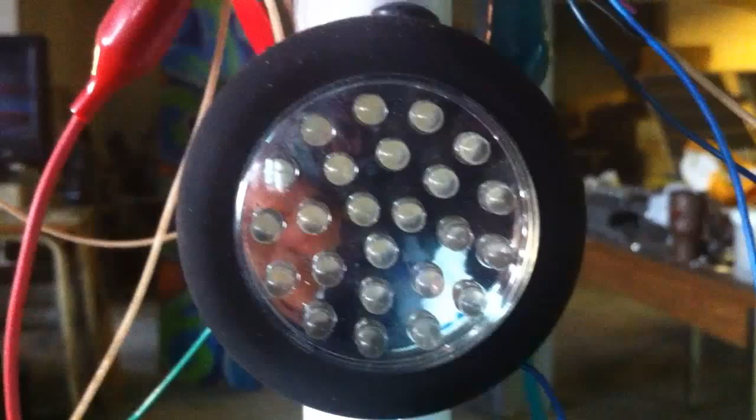Okay, back up because it's...

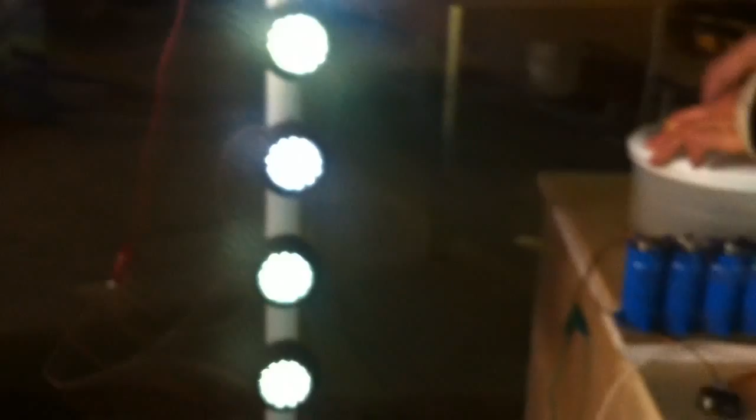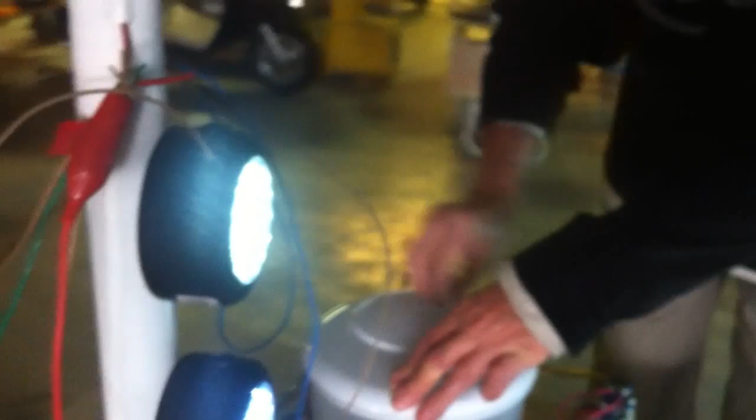Each one of these is 24 LEDs at about 15 milliamps, so each headlight is about 360 milliamps. So 3 of them are 1 1/8 amps, and 6 of them are 2 1/4 amps. Of course, that's at 3.5 volts. This is not at 40 volts.

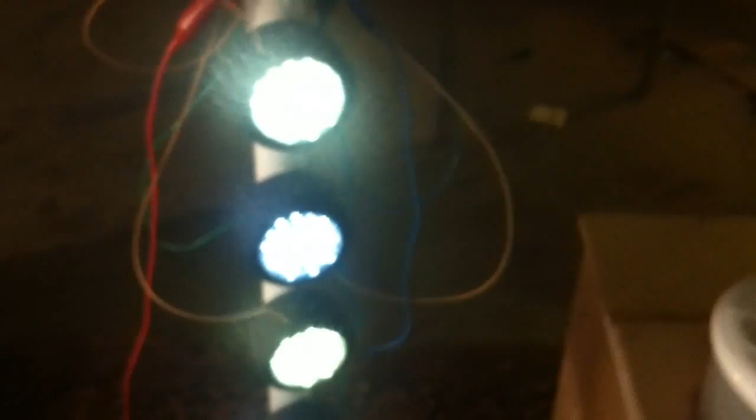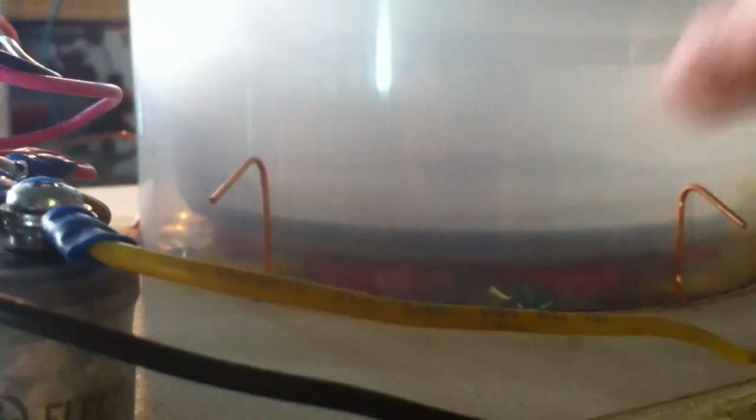But if you look here, this is a salad spinner type. I put the magnets in the bottom and the coils underneath. So the magnets spin, and it's got about a 10-to-1 ratio, maybe a 7-to-1 ratio. So it's going 10 times as fast as my hand's going around. So if my hand's going 200 a minute, it's going 2,000 a minute. And that's what is producing the light, and you see the control you have with an accelerator in the center of some kind.

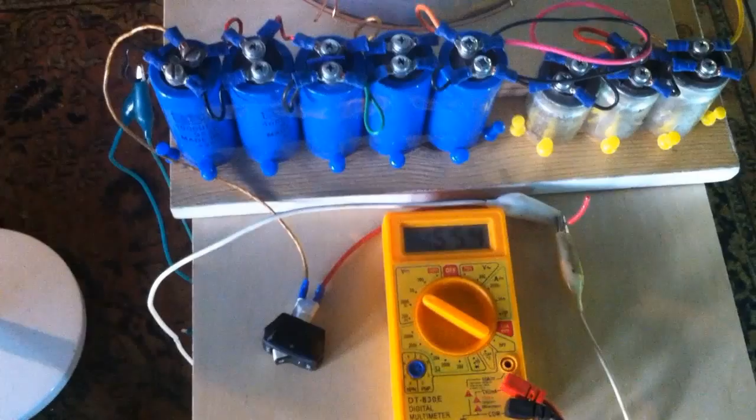All right, now you can look at the voltage, because the voltage is going to go up. The highest I've had it is 13. Whoa! I don't have the switch on. See that? How fast it goes up?

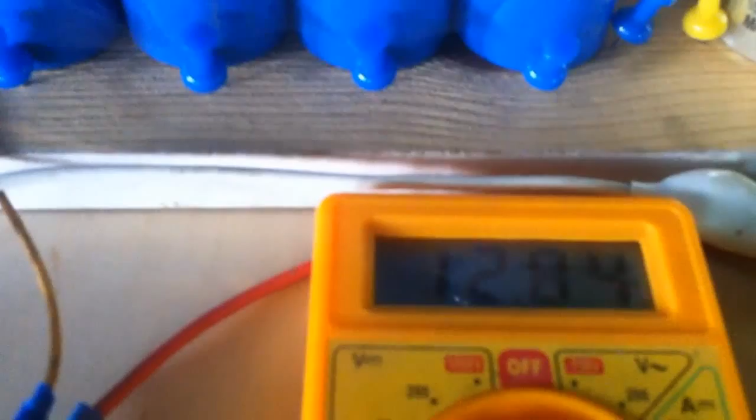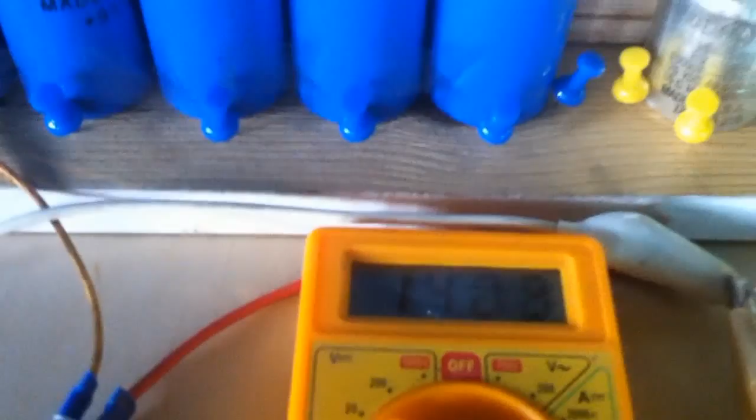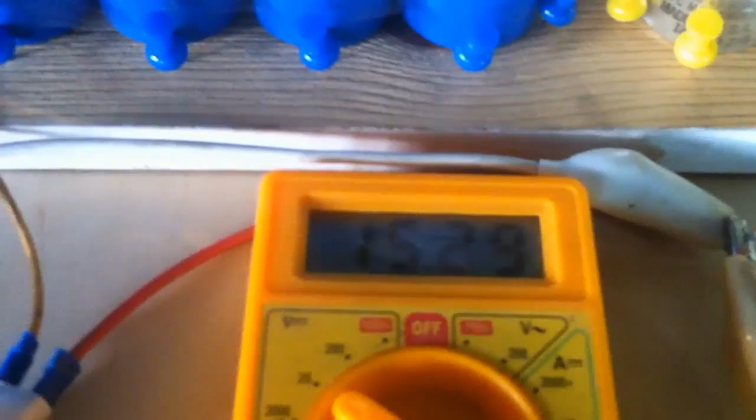Okay, it's got about 20,000 microfarads in those 7 capacitors. And I can get it up to 14, 14.5, almost 15. 15! That's the highest I got, almost to 16 volts. So that's the top output of this particular one.

And by the way, these are very small magnets and very small coils. I mean, it's 1-inch magnets, 1/4 of an inch thick, and 300 turns of number 26 wire for the 3-phase thing.

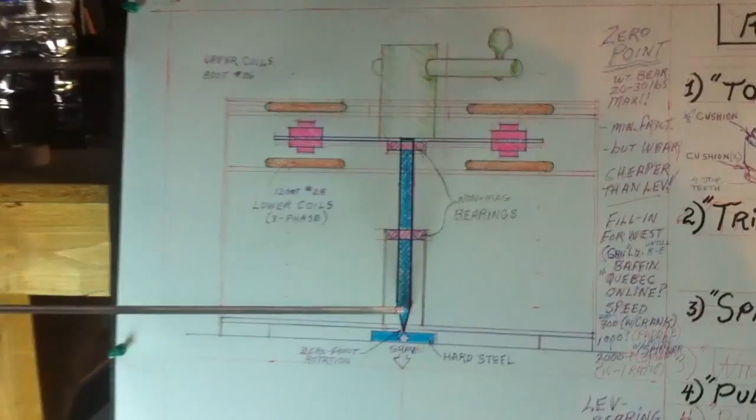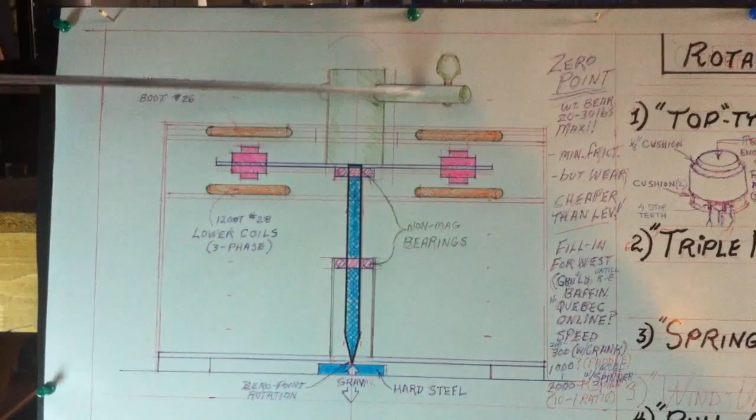That's okay. Okay, so this is the zero point apparatus. This is a 3/8 inch steel rod on a hard steel base that's in the big one. And it's got a couple of non-magnetic bearings to act as stabilizers, but virtually zero resistance, except rotational resistance of the inertia. And I have an old-fashioned crank shaft on it.

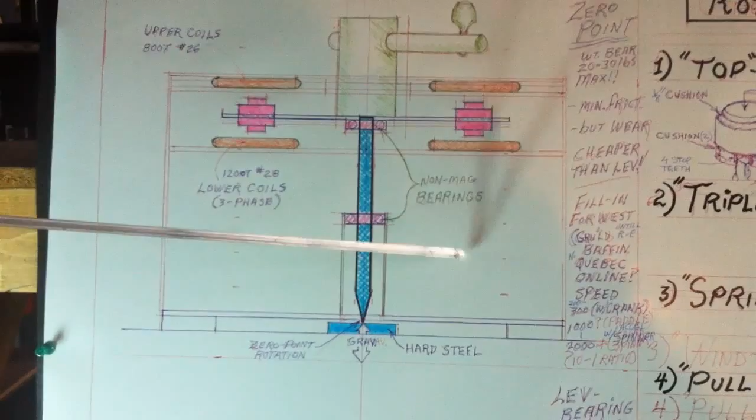So this cuts down resistance for 20 or 30 pounds of magnet weight, spinning between two sets of coils. When you get more weight, the wear is greater on the single point. So, you know, it's limited, and yet it's very efficient, and it may fill in for the Western powers before they get rare earth deposits that have been found in Greenland, the coast of Greenland, Baffin Island, and northern Quebec,

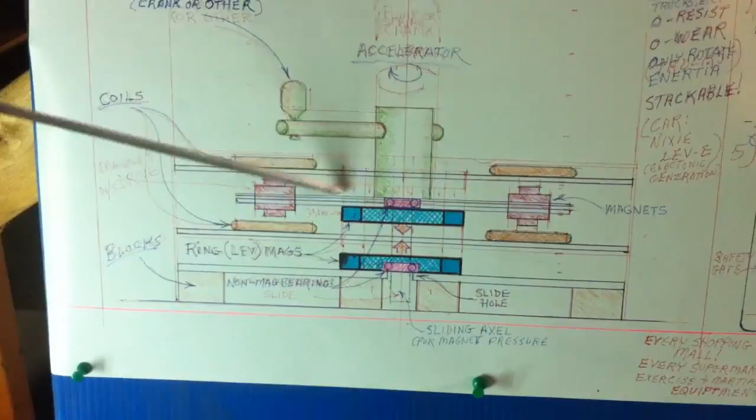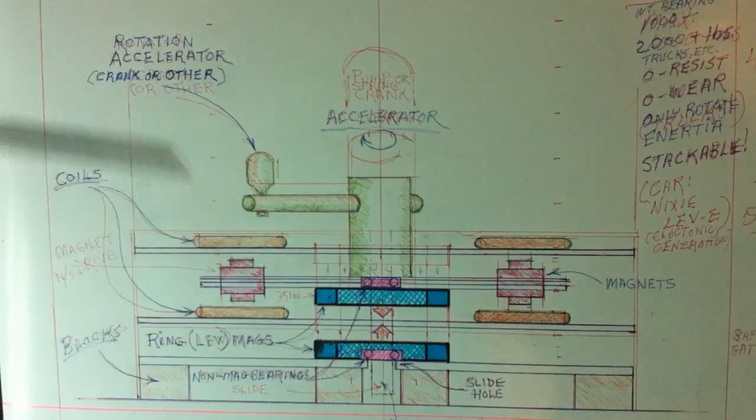and come online. Here is a version that I've only built half of, the lower half, of ring magnets. And in this case, with a decent power of the ring magnets, 4 inches is the biggest ones I've used, you can have 1,000 or 2,000 pounds pressing down. So you could stack up these all the way you want and turn them with a little finger at the top, and that's going to be good for trucks, heavy semis, heavy transport in the future.

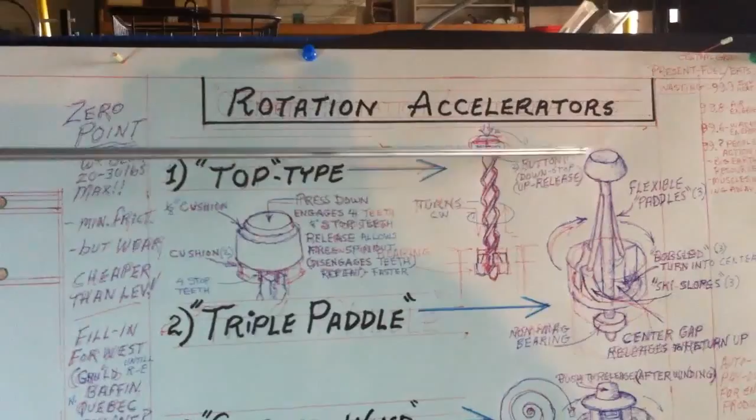Okay, so the problem here was, you're limited from the outside to maybe 100 revolutions per minute, like a children's tilt-a-whirl in the playground, pushing it from the outside, flipping it. And with a crank here, you get up to 200 or 300. But if you have an accelerator, as you've just seen, on the salad spinner type apparatus, then you can go up to 2,000, 1,500, 2,000. And with fingertip control with the right one.

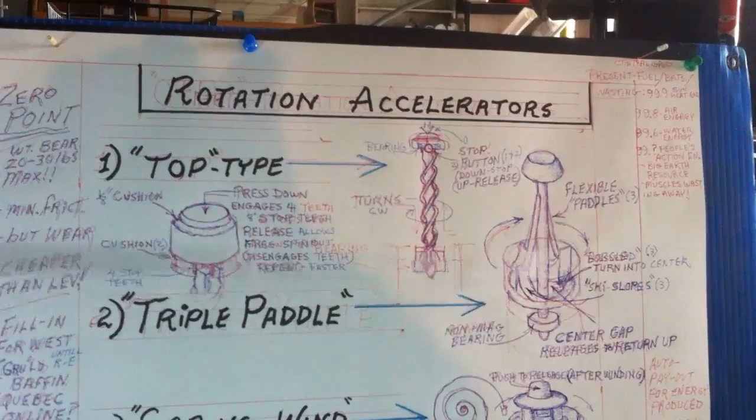Here's the classic top, which inspired the push-down types. Here's one I call the paddle one. And the paddles, as you dip them down, go toward the middle so it releases. This one needs a stop button or 4 little pins that engage and a cushion on top so that when you press down, it engages and stops the thing, so it drives the magnets, and when you release it and go up, maybe there's a spring or another cushion underneath, rubber cushion, elasticity, it releases and lets it just spin freely until you push down again.

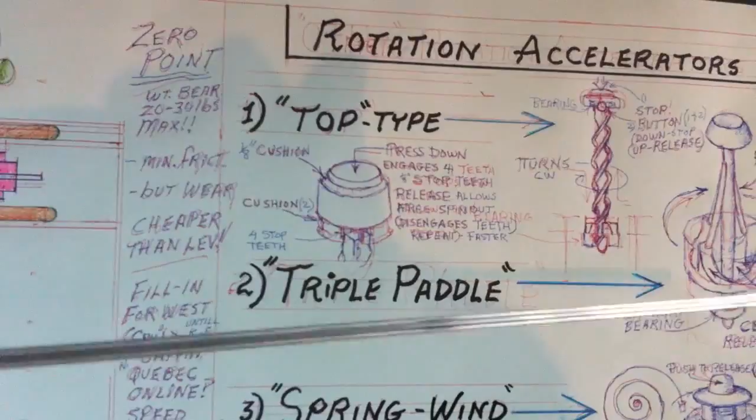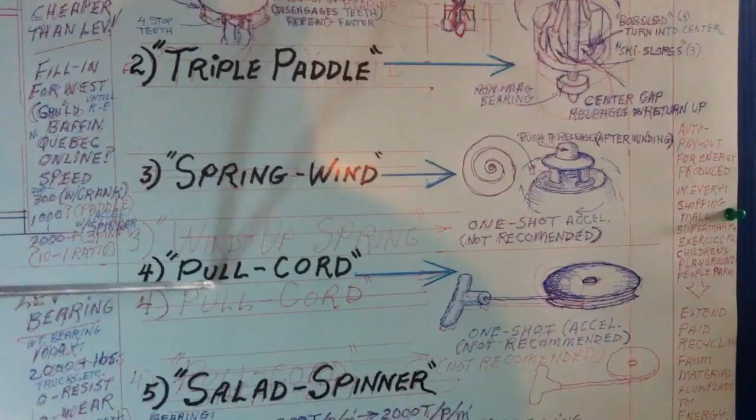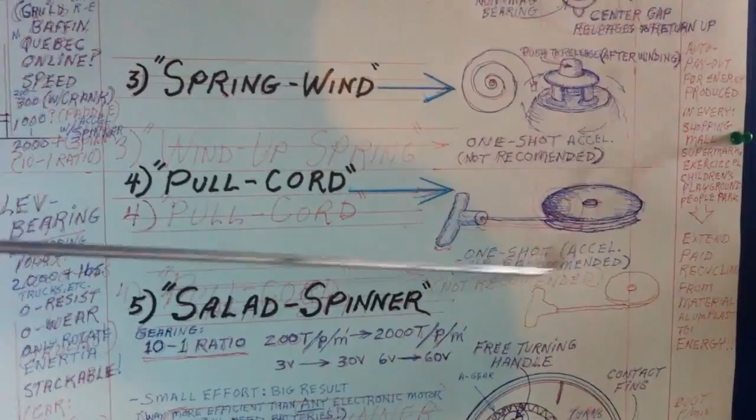Here are those, those are the first two. Here's a spring wound one, and you've seen them in the kids' toy stores, with electronic things and so on and so forth, very inexpensive, imported from China. And here's a pull cord one, and some of the salad spinner types have the pull cord, the older ones, right? It's modeled after chainsaws and outboard motors and things like that.

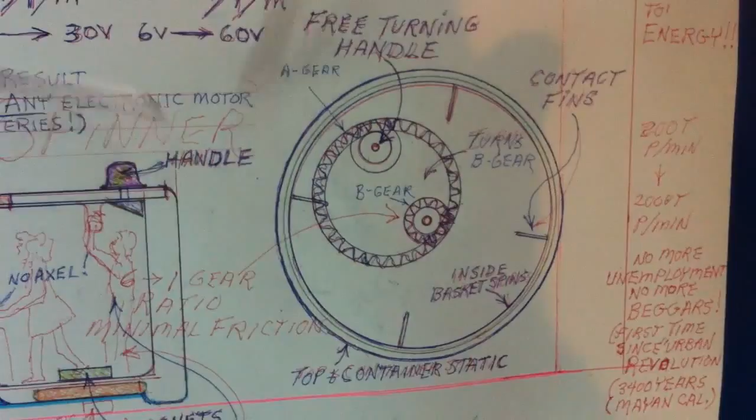And finally, there's the salad spinner types. There's several types. But the interesting thing about the salad spinner, besides the acceleration of the center thing here, and you can see the cogs, right, and the handle that you pull around on the type we just used, is the inverted zero point.

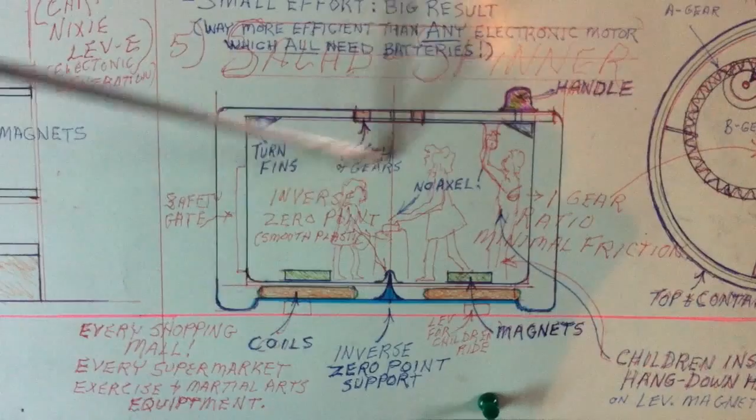The inverted zero point is a little plastic hill that comes to a point, enclosed by a little plastic thing at the bottom. They all have that, all types. It means that when you push down, you need no axle, unlike this primitive type here with the positive zero point action. Also the plastic is very smooth, so you have virtually no resistance.

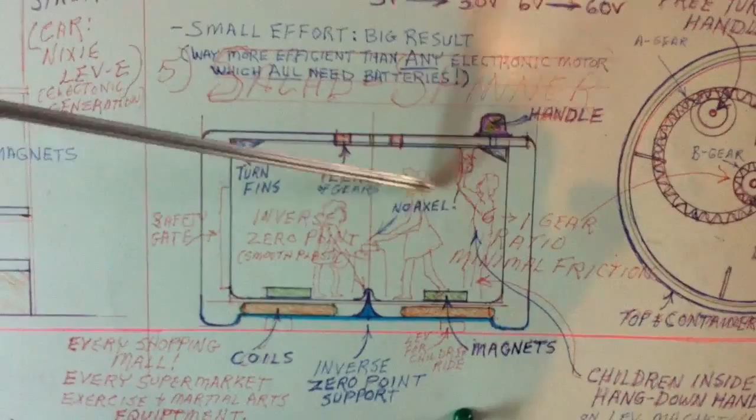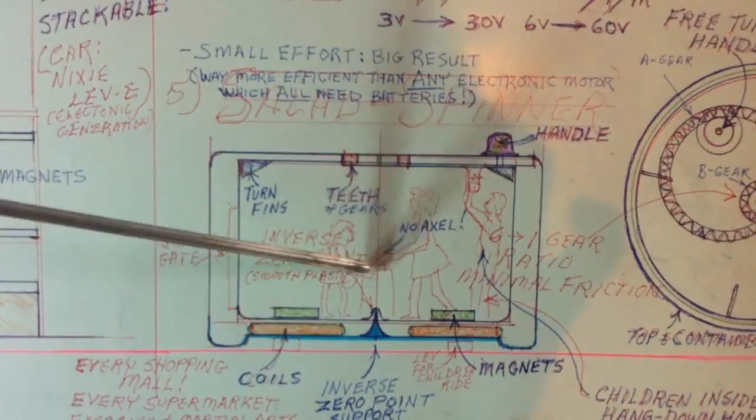You can see I sketched in some children on the inside of it, one of them has the knob hanging down from the ceiling, and the other is pushing the knob in the middle. So this is a safety door with a safety thing on the outside, so they can't fall out or anything. And this is perfect because kids around 3 or 4 love to be spun around. They're exercising their body and learning their sense of balance.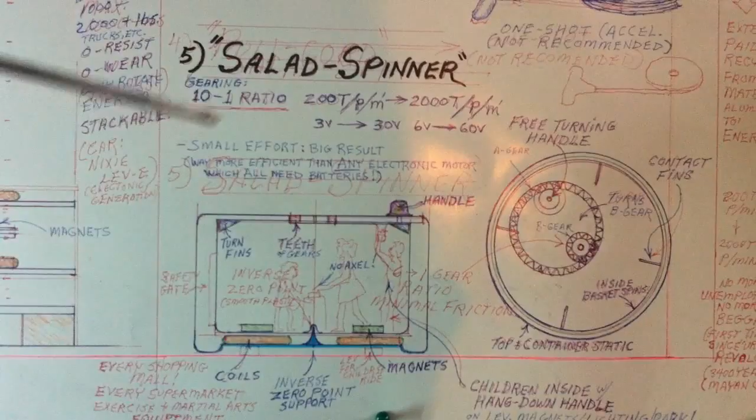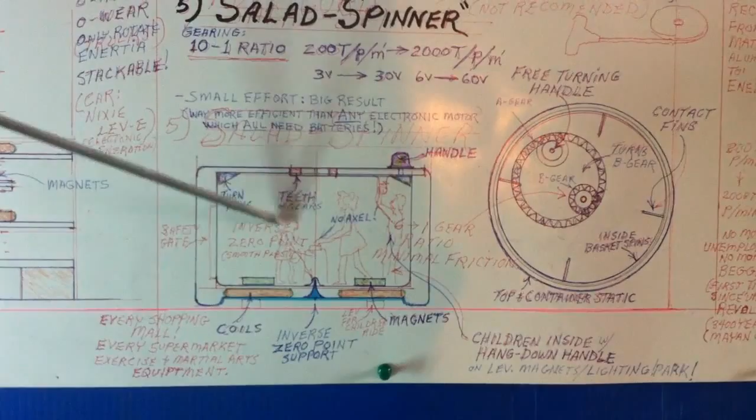As a kid's toy, generating energy and lighting up the area around them as they do it teaches them about energy. It's a basic toy, much better than the old tilt-a-whirl, whirligig, carousel, the mechanical thing we've had before. There's many kinds of devices. You can use one under a little pagoda that has lights going around in a hexagon or octagon or something, and the kids can do it different ways and light things up too.

By the year 2050, we hope that children under 10 years old are generating all the energy needed for lighting and refrigeration and heat in the whole world.

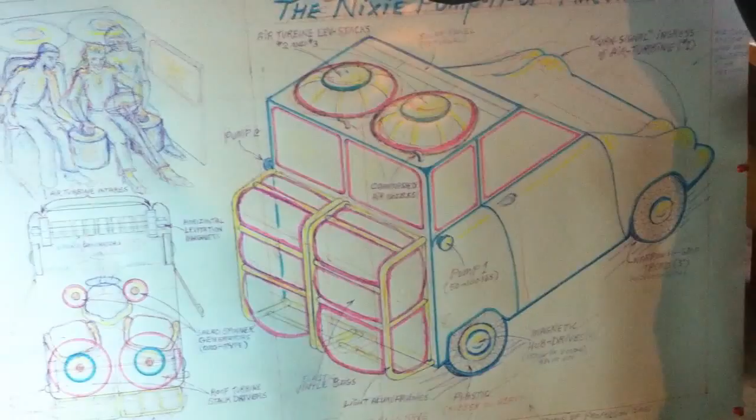To take part in this battle for peace, with peace weapons that I've been making for 40 or 50 years, my entire life, in favor of all life and the multiplication of all life, not just humans, and against war and killing, murder, mass murder, which there's way too much of, and it's got to be eliminated. The thing about fuel and electricity are part of that, and pollution and so on. They're all murder things of deluded, psychotic people who think they have to do it, that's always the excuse, right? This is wonderful for me, particularly today, because this is a completion of something I began way back in the 60s, early 60s in New York, with visions, and have proceeded through all kinds of byways for the last 40 or 50 years.

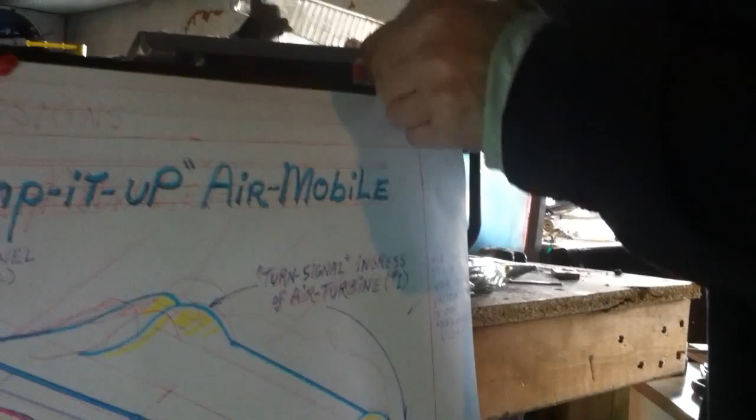Where's the hole? There it is. I've already had this one hanging up.

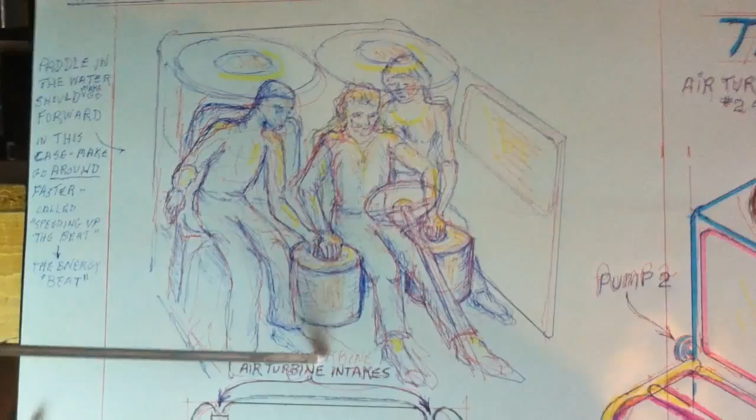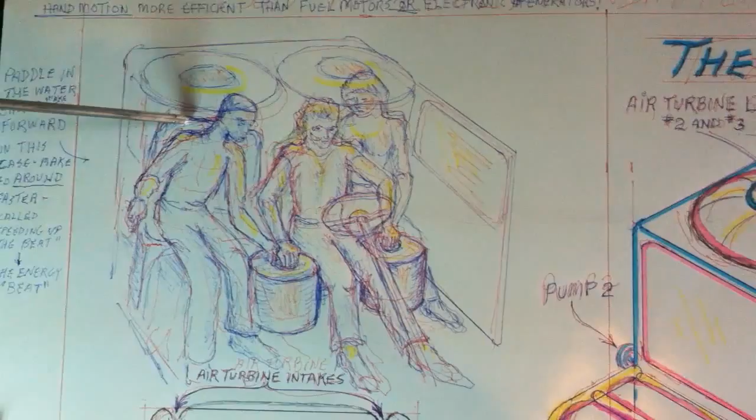So here you see one application of this in automotive transport. Here are the push-down salad spinner type accelerators that produce several amps of energy. Remember, they only have to take you to 15 or 20 miles per hour because the air resistance of the fluid medium of air will take over from there. You can see that the passengers can lean forward, it's almost like a drumming group here, right? You're drumming up energy and so on.

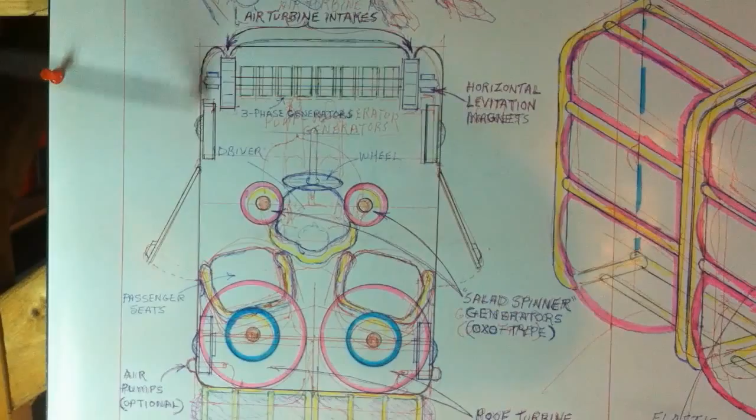And here's a top view, showing the things, the roof turbines, the front turbine. That's all been proved out in previous videos, right? And one version of the spinners that produce energy without any great effort.

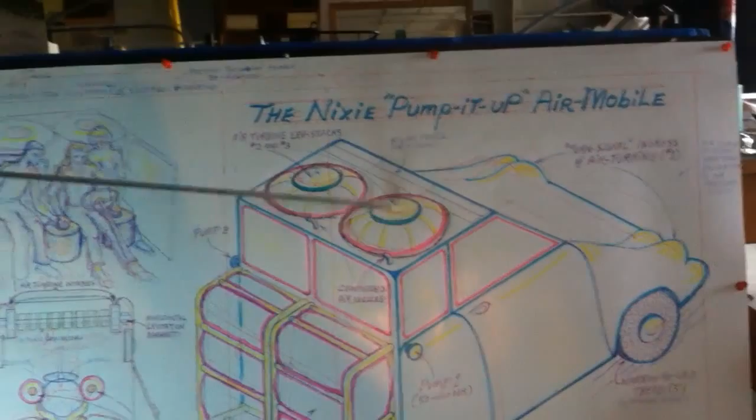So these are the two pump it up models. This is a pump it up that's all air. You've got the air resistance of the front 8 or 9, 10 generators. The top stacks that I've had up to 13 generators on each one, 3-phase, and turn very easily. But instead of the electronic means, you have 2 bags inside aluminum frames here that I'm using, baby's cradle rockers. And they've got vinyl, or somewhat better, more elastic plastic bags.

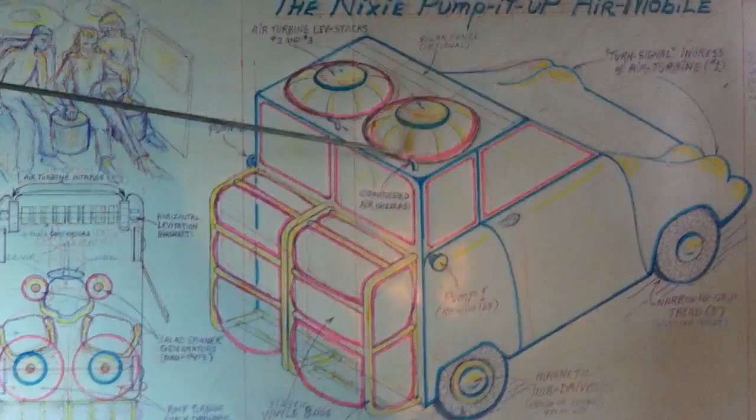And you pump them up from the side. After you pump them up, you have a petcock that releases the air slowly or more fast at the top. It spins these, which generates the energy, which gets you to 15 or 20 miles per hour.

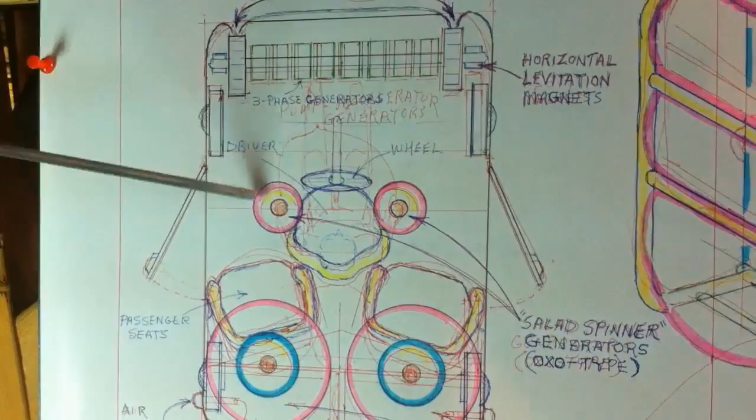So this is the air pump it up model, and this is the electronic pump it up model. Here you're literally pumping with your hands like you're playing a bongo drum or something, right?

And they can be combined. You can have the airbags too, right? And this can be going in the cities, and the people who wash off your windshield at the street corners.

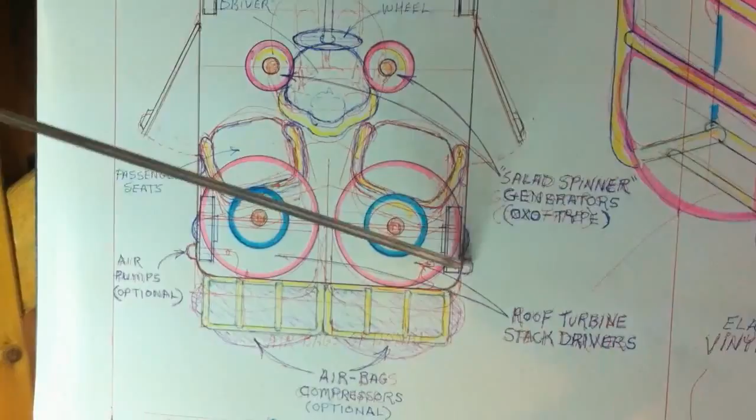You might give them a donation for pumping you up if you have many repeated stops. Or they'll put in batteries.

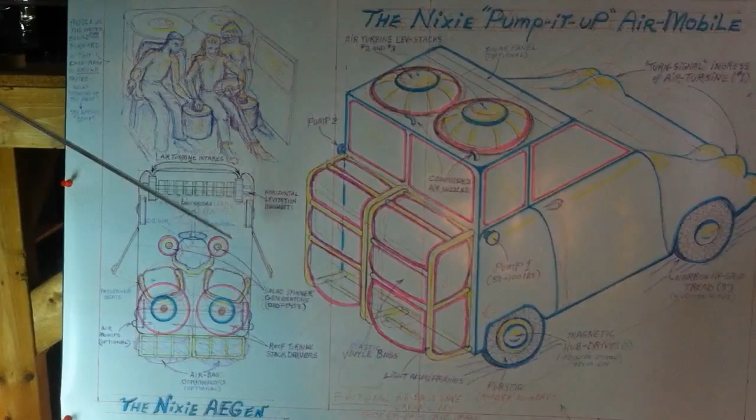So, you know, that's how we found to do it, you know.

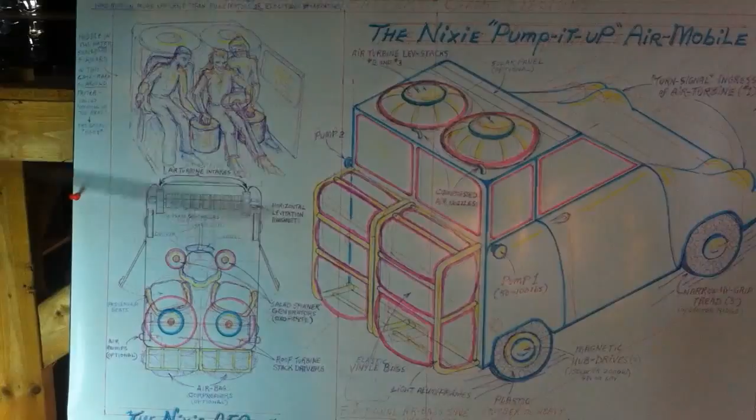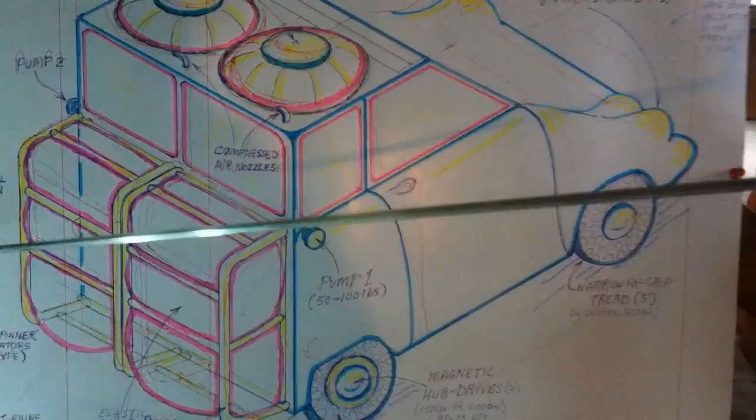The wheelchairs they've got are giving something 200, 300 milliamps, right? And those fast chargers that are closing down because they overheat the batteries are giving maybe 2, 3 amps. I mean, we could produce 8 amps here for each one just with a simple motion, right?

With the multiplication of the accelerators.

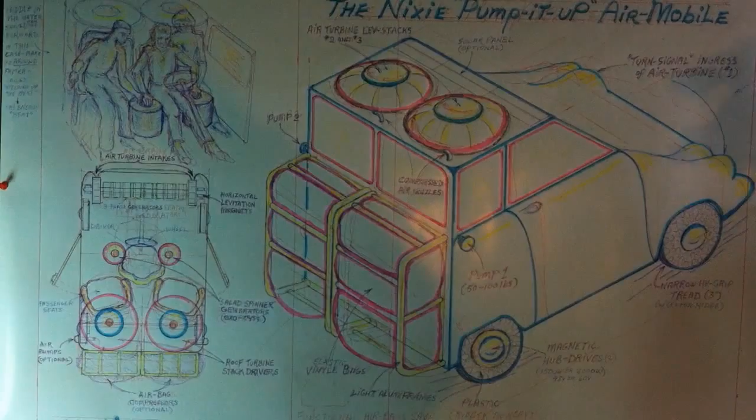So, you know, it's nonsensical to use batteries anymore, but they'll put them in. They'll put them in, but at least make them the size of a computer, a laptop computer. You know, 2 laptop computer batteries on one side and 2 on another.

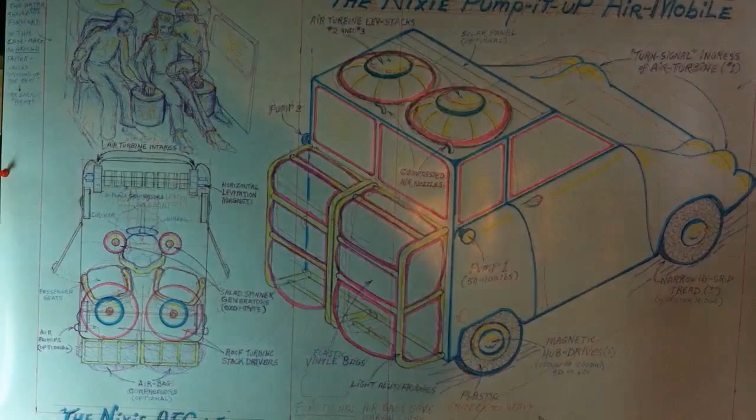You know, they're 15 volts, up them to 24, so they're 48 volts a piece. And, you know, you don't need thousands of dollars worth of batteries. You know, you get, what is it, a couple hundred dollars of batteries, if you have to keep batteries.

So when I show them this to me is just simply unbelievable.

That you're producing the energy of propulsion by pressing on what was the gas pedal, you know, is beyond belief.

Okay, here's one of the salad spinner types, right? And you take your foot and it starts to spin. And if you have the magnets and the coils there, it's producing energy.

And that energy is driving the car forward if you have an adequate amperage output, right? And you can have 2 of them too, right?

But what's interesting is that you don't have to pedal all the time. See, it's still going and you can start pedaling after. Now, primarily it's used for the initial acceleration. And it leaves your hands free.

Your hands are free to be on the wheel with both hands and to use switches or buttons on the wheel. But also, if you have a strong headwind, you can start doing this at any time.

And with 2 small dials, one giving the output of this and one giving your total output of all of your systems, you know, you can like accelerate, say, for passing. You want to pass, so you got to do this fast and build up the amperage. You know, it's unbelievable that your foot pedal is driving the car.

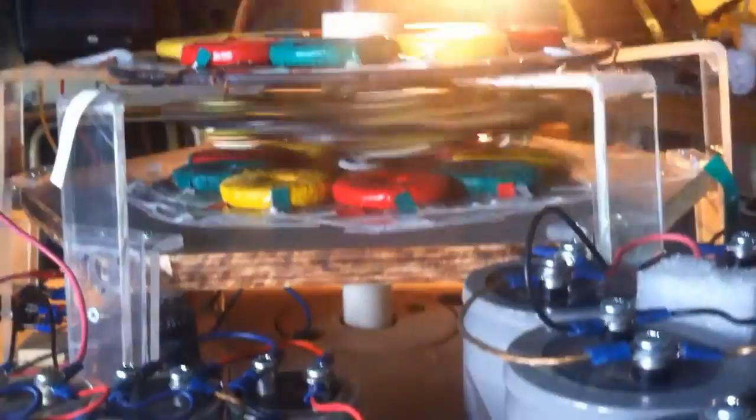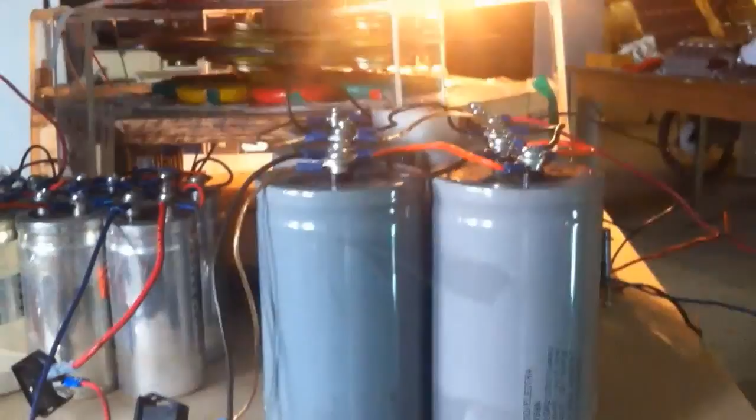Something seems wrong with this one. Oh no, 5.7, it's going up. I got it on 200 instead of 20, so it's, you know.

We'll put them on the same scale. No, don't, because it's going to pass 20, I think. That's the one that was giving much more energy than the other one.

See, I'm really working out here, right? Just to get it going.

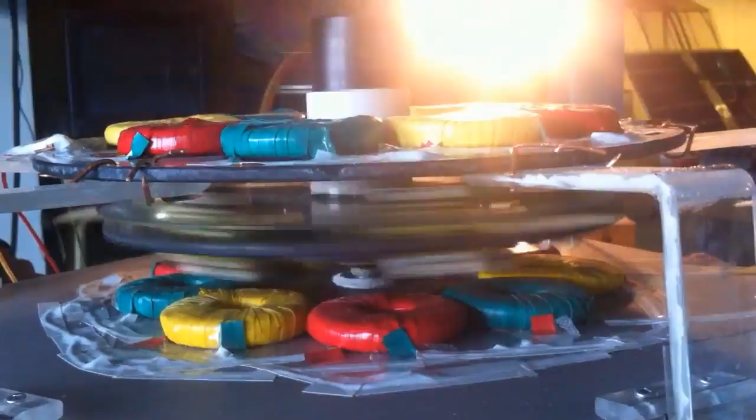Okay, we're at 10. I turned it on when we got at 12. So get ready now. You see the magnets, the size of the magnets?

That's 500,000 gauss. And those are 1200 underneath turns, and on the top is 826 turns. So this is heavy duty stuff, right?

The only thing is it's going too slow. Okay, it's at 14. Each one is at 14. Now that's a 10 million candle power light.

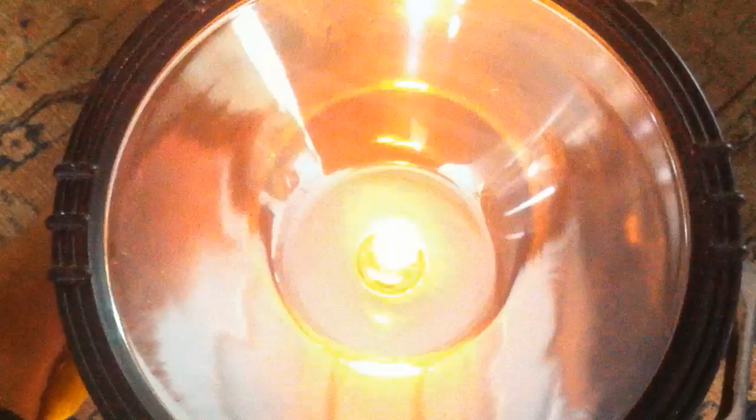Yeah, it drained it, and this turned over - it was on the point of collapse, but it lit. That's a lot of amperage, even though some of it was stored in these large things. Anyway, this revealed to me that even with zero point and a faster turn, you needed an accelerator in the middle.

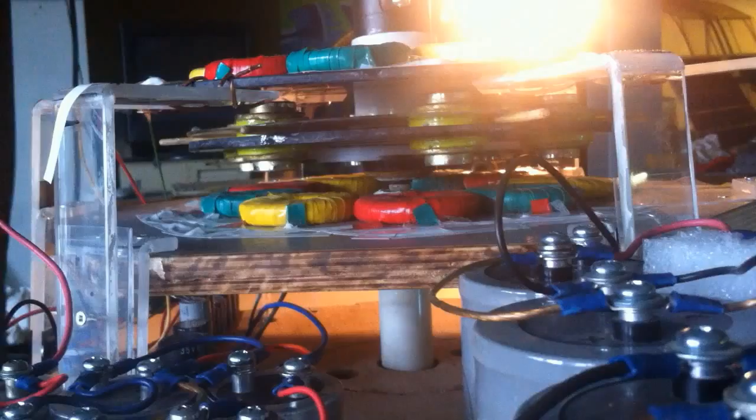As far as I know, that's the first time ever using those plastic solid spinner types to produce energy. But it ain't going to be the last time.

If I'll do it and other people are going to do it, I hope you all do it and put it in your gardens for your grandchildren, and they can contribute the light to the garden and the parks. Cut - we have one thing left to do.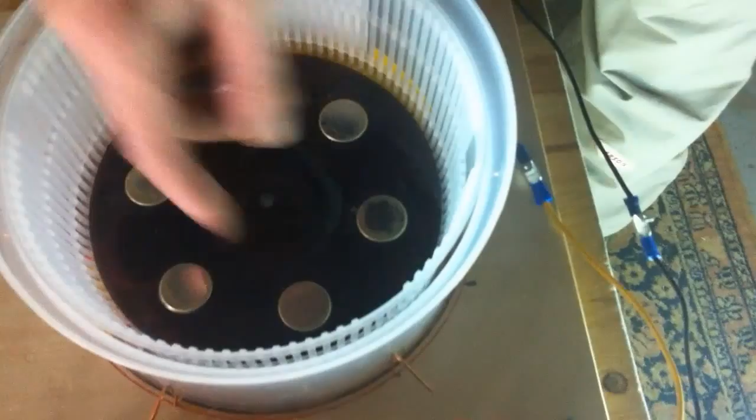Okay, to show you how this is constructed - you lift off the top, just like you have a lettuce in there, and there's the magnets on a sheet of plastic embedded with glue, glued into place. You lift out the basket, and there's your three-phase generator coils.

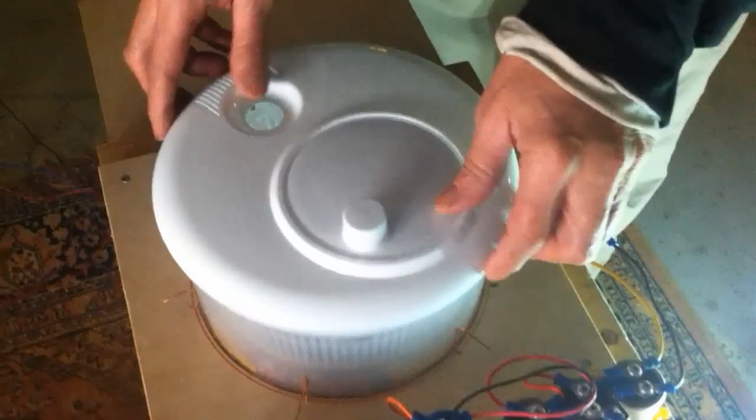So when you lower the basket, it goes over the inverted zero point inversion, which allows this to spin very easily, and that's how it was lighting up all of those LEDs, the 144 LEDs you saw.

Okay, this is the development of automatic machines, and one interesting thing is the multicolored ones from 1895, at a time when alternating current was being invented, along with three-phase generators. So they were color coding it, and you can see in our little device up there that I was color coding it too.

And you can win money - they have payouts, you take a chance, blah blah blah. And here they've got three.

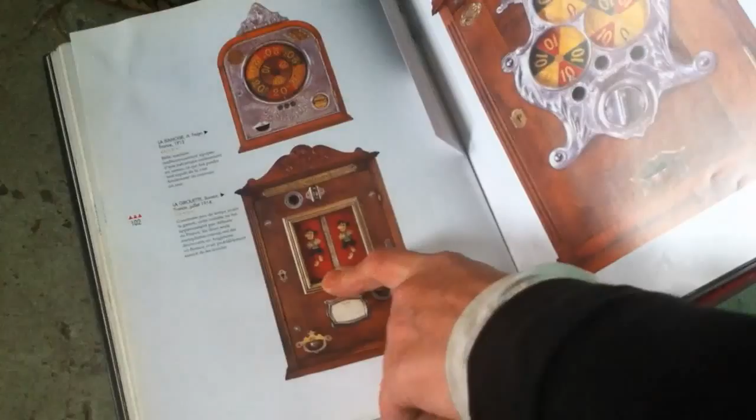Oh, there's Mickey Mouse in 1914 - I guess it was on The Simpsons show. This is 10 years before Walt Disney. Well, the Americans were stealing ideas. Nobody had a patent they gave a damn about, except maybe the English.

Okay, so now it's a three-arm bandit, right? And it's giving jackpots, but it also gives products, so you can see it advancing. Here's another one, and here's one with room for five or six in 1935. It had developed to six of them, and then it went underground.

Here's music with automatic jukeboxes, right? And these have been replaced by digital stuff long since, and now it's in everybody's hand walking down the street.

So even shocks - they even paid a penny or something for getting a shock. It was called the shock treatment that would liven you up.

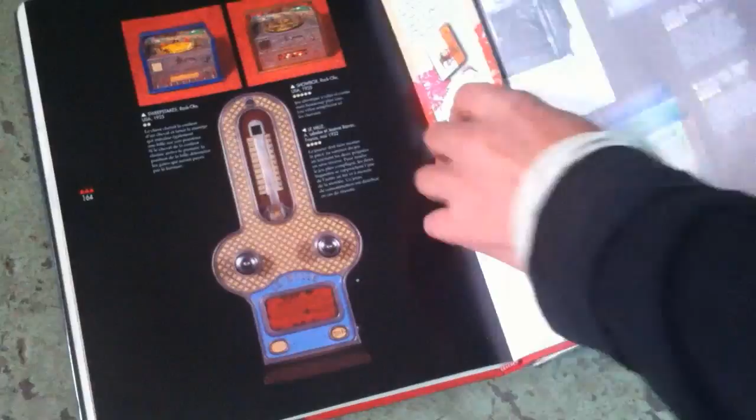So my point is that you go to a supermarket now and they'll pay you for recycling cans, and they'll pay you for recycling plastic and material things, even coins now, because they're phasing out currency. But that's all material - they recycle the material.

But what about energy? If they have a machine like this, they can have a meter on it, because they've had automatic meters - that's how they charge for grid energy. And as you do your salad spinner there, type acceleration, and you generate 110 power, you can have a timer and it dispenses money to you just like they do for the tin cans.

So you can't call it recycling, because it's called cycling - you're creating the energy right there and you're getting paid for it. And you know, they had it illegal to give currency, so they gave tokens - tokens that were good in that shopping mall or that store in Paris, if it wasn't legal to give currency.

So you generate some energy, you go into the store, you buy your sugar, your tea, your coffee, whatever, and you're contributing to the energy, doing the lighting, and the freezers for the ice cream and so on, and frozen products.

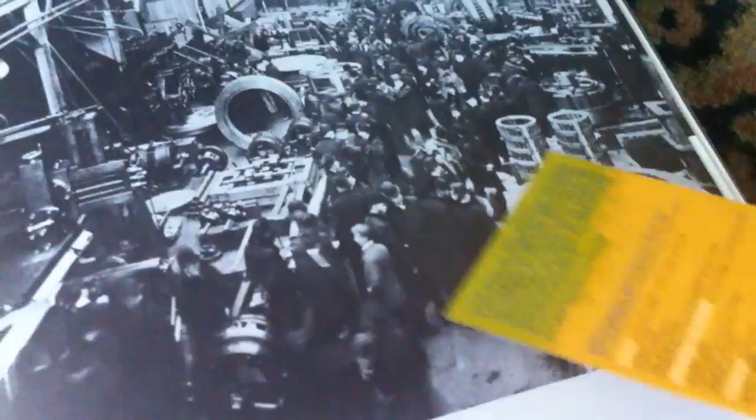Here's an example of the factory in 1903, here in my city of Montreal, where we were building the turbines for the first St. Lawrence Rapids dams. You can see they're about 3-4 feet in diameter. At the time, magnets were about 1/20th the power of the ones I've been using right here. So you reduce the 3 feet down to 9 or 10 inches, and you got the devices I've been showing you, right? And those devices can be put in right everywhere.

Restaurants, people could generate energy. Pinball machines—you know, they got pinball machines in the other book, besides jukeboxes and everything else. Every dispenser can be generating energy. The children can be doing it in the playgrounds with their toys.

Somebody accused me of saying, oh, he wants to send children to work—an Irish guy, right? No, this isn't the 19th century with chaining kids and sending them down in the mines. This is their toys. Are you listening, Fisher-Price?

You got a lot of plastic stuff that's sitting around the yards, being thrown away, that could be recycled. You got a lot of things with batteries—you don't like batteries, well this is a way to get rid of the batteries. Do some energy-generating toys. You're doing things that use batteries that make music and so on, so do things that the kids can contribute to.

The children. Look, we're wasting 99.9% of the energy coming in from the sun, the fire energy, heat. We're wasting 99.8% of the air. We're wasting 97% of the water. And now we're wasting away the muscles of the population, right?